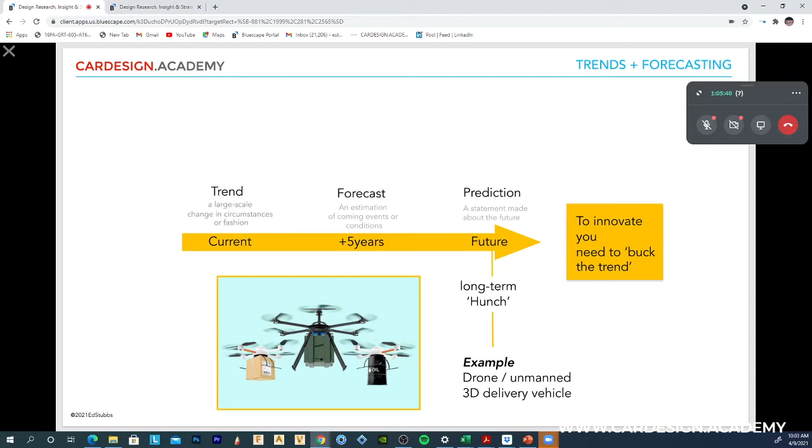So those three elements - trend, forecast, and prediction - are a really helpful framework when you have an idea that you're basing around something that exists now. It's a really helpful model to map out possible scenarios around an initial concept idea. So trend, forecast, prediction, and the time frames can be whatever you want.

For instance, when we're looking at automotive projects, a facelift can take a year or two, a mid-cycle refresh, and so something like a new model can be beyond that forecast period, 5 years plus into the future as well. So that can change according to the industry that you're in. So a couple of other examples just to cement what we're talking about here.

Let's say you embark on some research around social trends that give you some understanding of how people are behaving in certain societal conditions. What we find is that you can pull out from a series of data a clear statement that suggests a lot of people are lonely and have a technological dependency. That's something we have data for now.

So research around data that exists now can feed into a prediction of what might happen in the far-term future. We take that same idea about loneliness and technological dependency and extrapolate it to guide a project. It can be as straightforward as saying a vehicle can become an enabler of social interaction. We know it's beyond A to B, but it can become the hub of community behavior, a place where people gather to eat, or gather to listen to storytelling, or watch films together. You can take that one insight from a current trend, and with that extrapolation, create a strong idea that has a fundamental basis in today's fact.

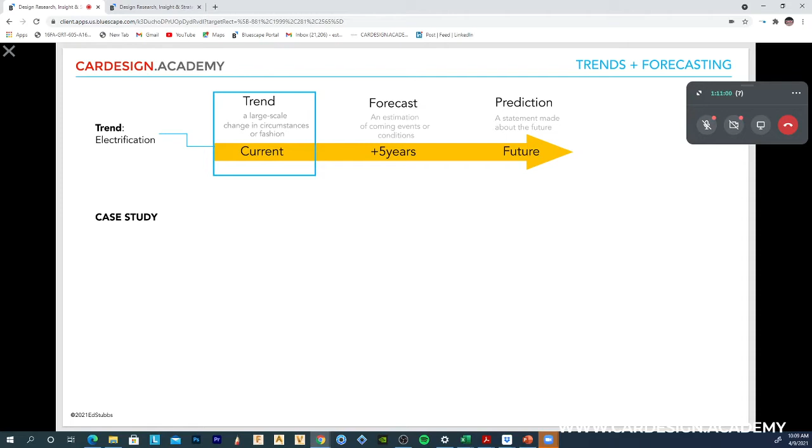What I'm going to do now is go through one other example, a simple one that everyone, I'm pretty sure, is fully up to speed on, as you're all automotive in some way or another. Let's talk briefly about the trend of electrification. It's on the cusp of being a large-scale change in circumstances or fashion, certainly in certain countries where the uptake of EV is huge. Norway springs to mind at the moment. So let's look at that in some detail and understand what we can predict from that current trend.

At the moment, electrification, compared to existing internal combustion engine cars, has huge tangible benefits. There are also some drawbacks, one of which is weight, partly because we're building around generally fairly conventional construction methods, componentry, and assemblies that are previously or very similar to conventional ICE vehicles.

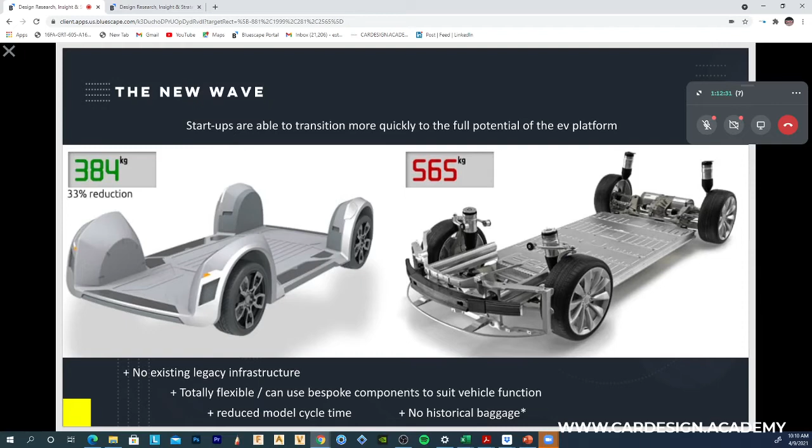However, if we take this idea of electrification and look at what's state of the art, the cutting edge of that technology now, there are plenty of startups out there who, because they're not legacy companies, don't have huge numbers of plant and billions invested in production lines and infrastructure. They're able to make huge transitional shifts towards much lighter, more modular and compact components that can really impact the design of the vehicle. They can be totally flexible, and you can plonk on any body frame, any body shell you like, giving a huge number of different functional vehicles. So we're looking at the agile innovators around that trend of electrification.

Some of the enablers here in terms of innovations, if we go back to that RISE acronym, if we look at Canoo for instance, Canoo are the first company globally, I think, although Infiniti messed about with it, to introduce true steer-by-wire, so no connection between steering column and steering rack. I think there are some legality issues in terms of how that's applied globally, but that's a true enabler to allow huge numbers and true vehicle modularity around this EV platform.

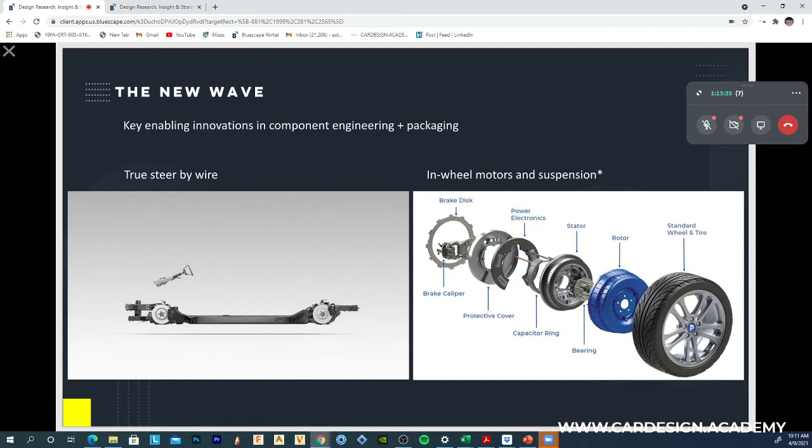Another potential enabler is the in-wheel motor and potentially in-wheel suspension. Again, it's not really viable at the moment because of unsprung mass problems and implications for ride and handling, but it's on the cusp of becoming a thing.

If you look at perhaps the cutting edge of skateboard chassis at the moment, a company called REE, I think an Israeli company, have presented a number of different concepts around this kind of skateboard chassis, with every component shifted as far outboard as possible so it doesn't impact on cabin package space. Everything's modular and swappable, a fully scalable, stackable system. That's current state of the art.

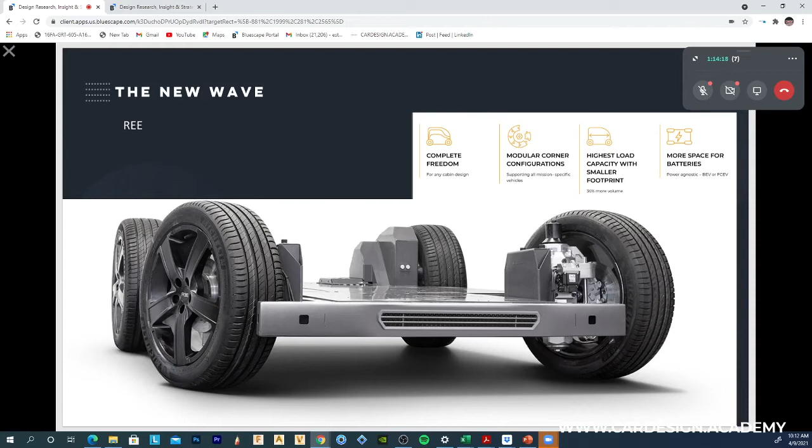If you look at something perhaps a little more understood, which is Canoo, we've got the steer-by-wire I've mentioned. We've been able to see the main components, like the HVAC system, which is huge and in most cars takes up the bottom of the center console, shrunken to an extent but shifted to where the internal combustion engine used to be. So some real package opportunities opened up by this trend of electrification.

Batteries contained within the chassis profile, no great shakes, that's pretty understood at the moment. One thing that's potentially interesting is that this idea of shifting components around has enabled Canoo to use a transverse leaf spring, a carbon or composite leaf spring. Again, not unique, but it brings all those components that intrude into cabin package away and under the vehicle. That's what it's all about, effectively.

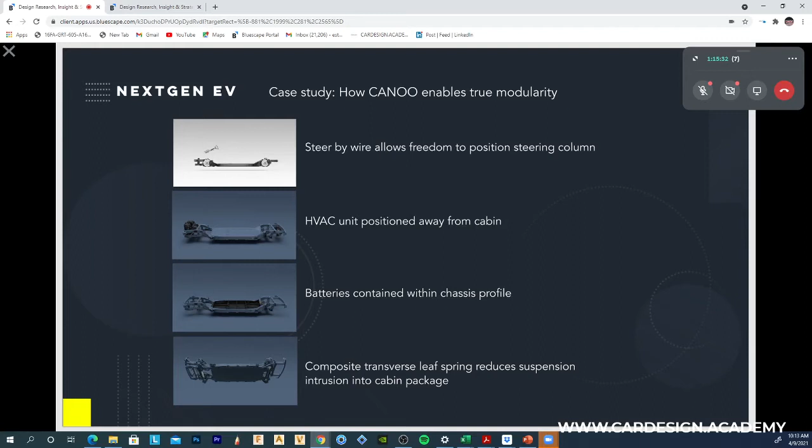And that push and extrapolation of what electrification can offer can be seen here, where we have the modular shared chassis, with a large number of vehicle segments and functions able to operate on that one shared skateboard chassis. I won't play that. And effectively, just to finish up this segment, what that's offering is a full circle back to the good old days of the Model T and body-on-frame.

Which was the whole point about the agility of the production line. We've moved away from that now generally, apart from various trucks, but effectively we've moved to monocoque for cost, rigidity, etc., and various reasons. The current infrastructure is based on monocoque.

This paradigm shift, this hunch, this bucking of the trend that innovators, the agile companies are able to do at the moment, such as Canoo, is really going back and enabling what Ford Model T did all those years ago, which, if you look at the brochures of the time, sorry for the history lesson, but it does have relevance.

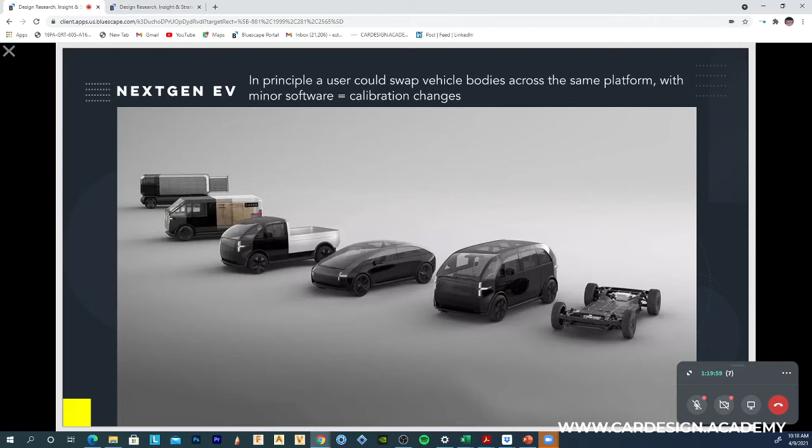You've probably heard of these kinds of concepts where you get a share in the chassis of the skateboard and pay a monthly fee for that. Then you can take it in and get a body style changeover in a matter of hours while you visit the store down the road. So you have a road trip package, a passenger vehicle package, the Canoo off-roader, which they brought out a few weeks back as well. So those elements have a knock-on effect to the user experience, the journey experience, if you like, of using that vehicle as well. All of those elements interlinked.

Okay, let's move forward across here.

This will form the basis of what we're going to be doing over the next few days. I'd like to share two projects in particular that are quite nice exemplars of using trend research and extrapolations of that research to inform a really strong initial design concept or design brief.

The first task is built around looking through the megatrend material provided here on Bluescape, and to pull out 4 to 5 key trends, forecasts, or predictions that you consider form the basis of a strong concept. They might be trends that you extrapolate into a prediction, or actual predictions made within those materials that you can take wholesale, piggybacking on that data to support it as the formation of my concept brief, my concept definition.

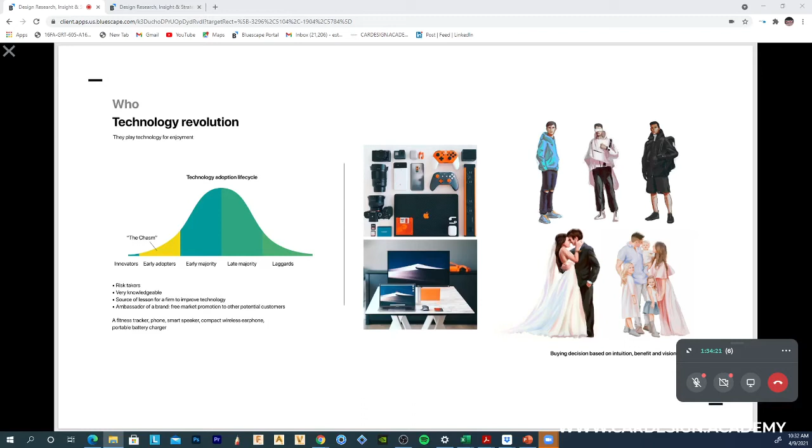So this is a little bit around personas, which we'll look at in more detail next time. But this is generating the story, the narrative that supports and informs the design that comes out of this.

And then we start looking at some scenarios and, if you like, basic storyboards - something we will look at in the next session. But looking at the idea of the vehicle physically connecting to the house.

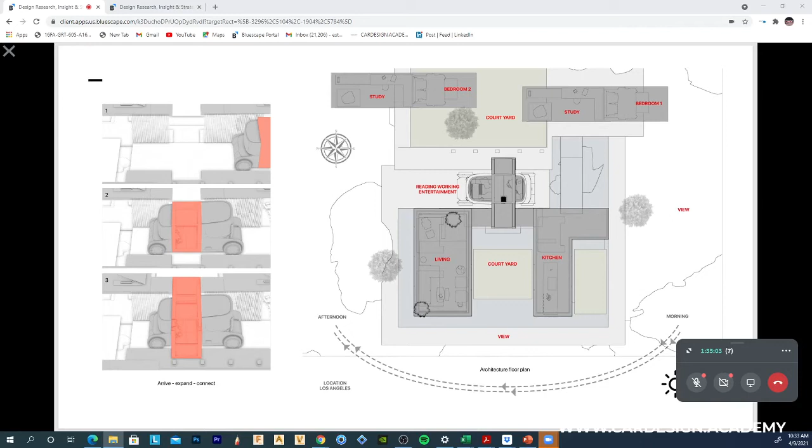Then moving across into the basic layout and how it all integrates together. I'll just show you the rest of this. It's less relevant to the research side, but I would like you to see how it evolves, because we're creative, we're interested in this kind of automotive solution.

Interesting connection with the idea of different phases of where you live - so you get this morning sun in the kitchen.

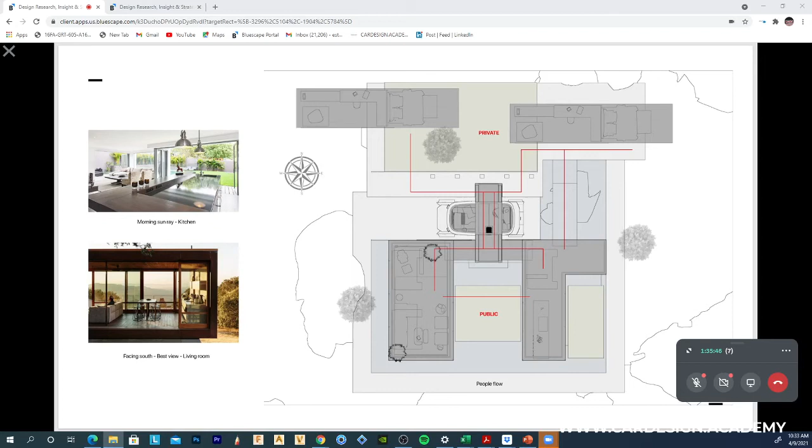And with this kind of proposal, he's suggesting that actually it's very modular and the rooms can be interchangeable as well. So he was designing the living space and the vehicle that integrates into it.

In terms of an experience and using the technology, the cutting edge technology, to heighten those experiences - so we're talking about using projection mapping to create perhaps an experiential space, and interactive lighting technology, so that it becomes an immersive experience in terms of your touch points, your haptic elements within the vehicle, and it brings people together through technology.

That was one of the key themes here. Again, some other examples of that using his particular interest in his painting, etc. But perhaps an opportunity to create an immersive experience and add interactivity.

But also, that's kind of expected on new concepts, new vehicles, new proposals. This idea, though, is strong around bringing people together and to give them something from traditional communities, perhaps, that we feel we've lost.

Most people will say, what with social media and always being connected, I'm always online and talking to people, but my actual face-to-face contact and community sense is not as strong as it was when my parents were the same age.

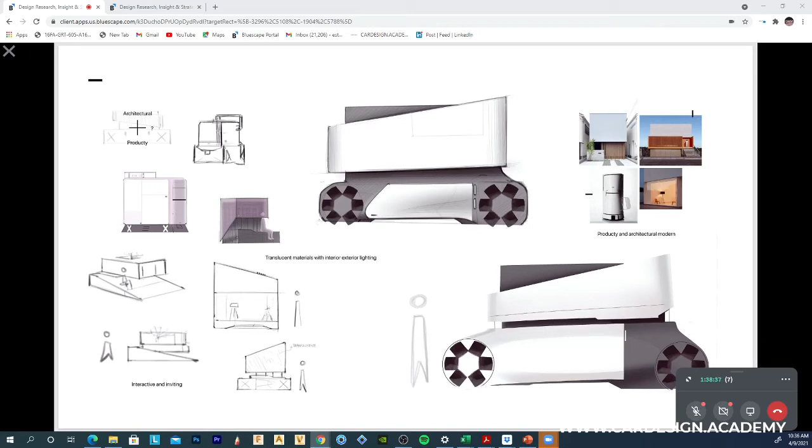Sorry, Ed, how can I see what you're presenting again? My internet went off and I had to reconnect. Is there anything I can click on? Let me try this again. Oh, hold on a minute, that's screen sharing. Oh, there you go, is that working? Super, perfect. Thanks, Ed. I don't know where that broke off, but I'll just carry on from here.

So this is moving into the creative stages of the project, which this part of the course isn't really focused on, but it's useful to see that extrapolation of an idea and how this person has developed it, because those ideas stayed central to the concept all the way through.

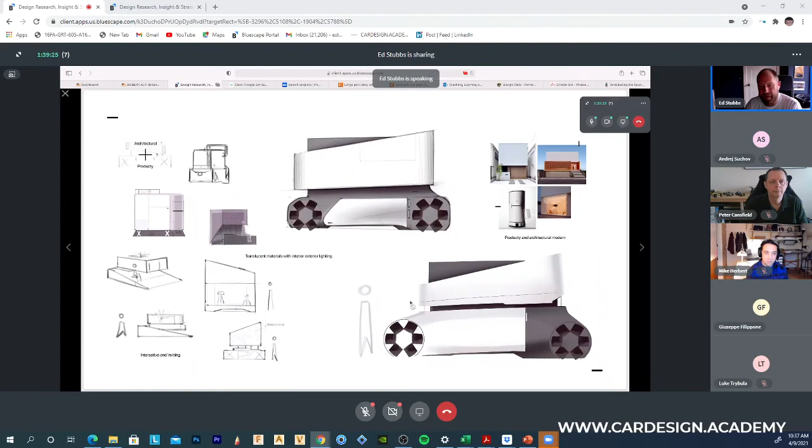So these are the initial ideation sketches, using very clear product inspiration, but also architecture, because that's one of its main functions, exploring different forms with some perhaps Japanese references to inform these square and modular elements of architecture.

And then starting to explore how it could blend and link to a dwelling or a residence, and how you could connect people through the vehicle.

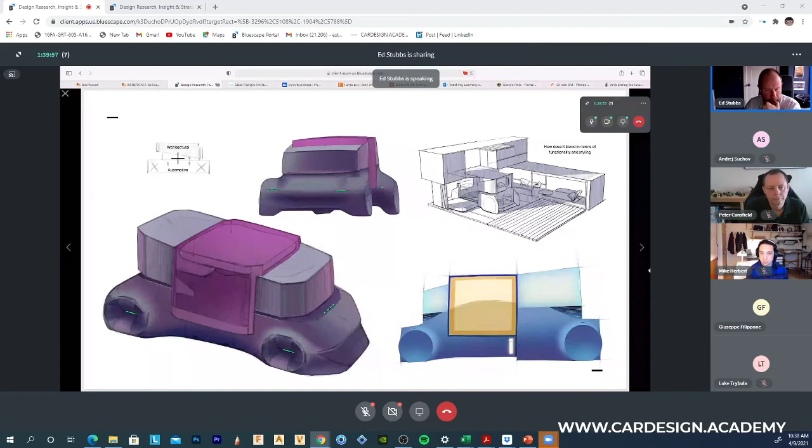And these are really nice sketches that show the different ways, different levels as well, of how people could connect. So not only with a story floor here, two stories, two floors, but also within the vehicle. It doesn't all have to be linear.

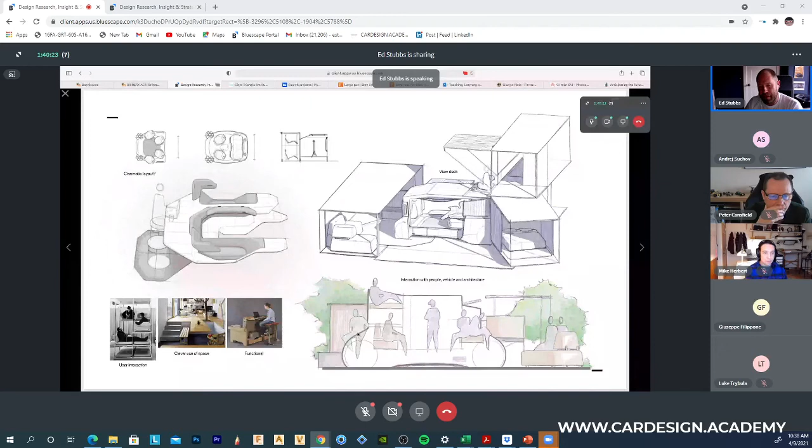If you're trying to create a living and interesting experience in a vehicle, it can actually be on the roof of the vehicle, and that removes you and takes you to a new experience of how you view things. These kind of images are quite powerful to link the outcome here.

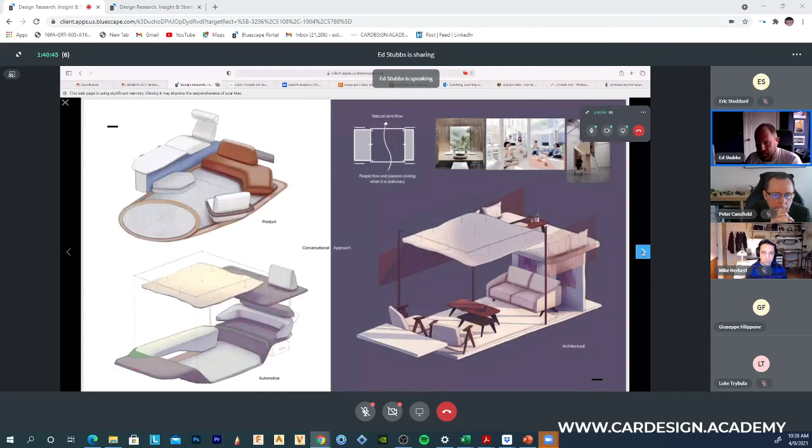And then more depth into the interior componentry and the layout and the function of the interior, etc. So I just thought I'd share this project, and you can look through this in your own time.

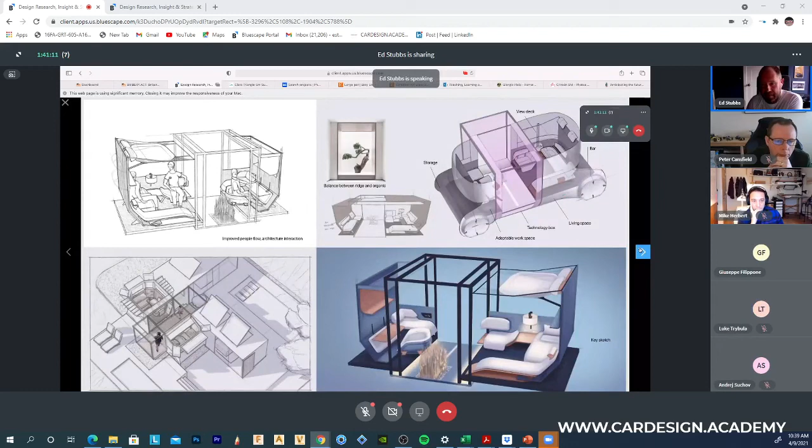It's a particularly strong one, I think, and really creates something that's really fresh, a very good example of something bucking the trend, perhaps, rather than just something that is an expectation of what we might imagine today.

So I'll leave that one with you to look through, and I'm just going to quickly go through this for 5 minutes before maybe we can have a discussion or comment. So this is the same kind of level of work, really, but hopefully you can see that.

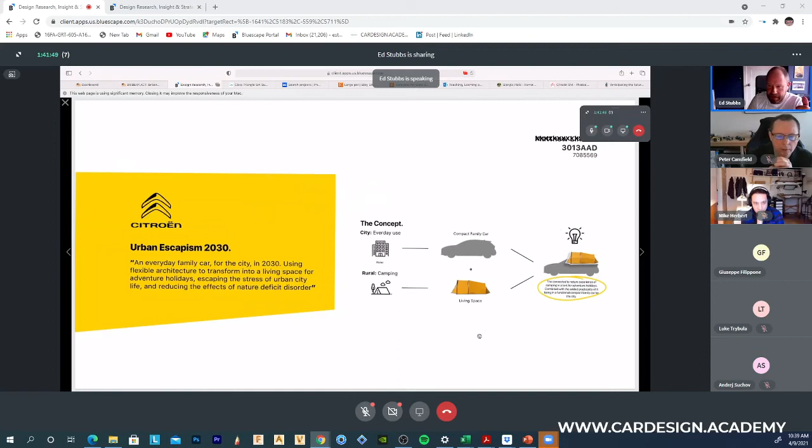Yeah, okay, urban escapism. So this, again, focused very heavily on the initial stages of the project, and they were particularly strong for this. So research informed this definition of the project, which was this huge increase in megacity population.

And also a societal bit of research, which was interesting, or cultural, that looked at nature deficit disorder, which I didn't know anything about, didn't even know that it exists. But that's something that children suffer from by dint of being in front of a tablet or a laptop or a screen the whole time. It's actually a disorder that means they suffer developmentally, and they have connection and communication issues with people as a result.

So you put that element with the idea that more people are living in urban populations, although COVID is adjusting that now, along with this idea that people are interested in an elegant and luxurious camping experience, and you come up with effectively the concept definition that is this.

So let me just move across here. And again, these elements that I'm showing at this point are things that we're going to be working on in the next session, really. We're asking you to do that real upfront piece of personal research so you can bring some ideas that we can then build upon in the next phase.

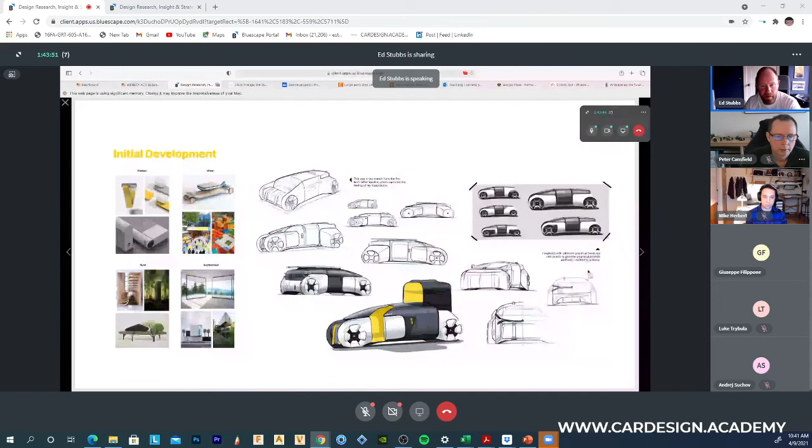So that initial research, though, brought about this concept of creating a vehicle that you can camp in that becomes a real experience. It's not a sort of harsh camping vehicle, and it has interesting elements to the interior experience as well. So I'll just whiz through this so you can see it.

You might have seen this on various forums, etc. It won the Magna design competition last year.

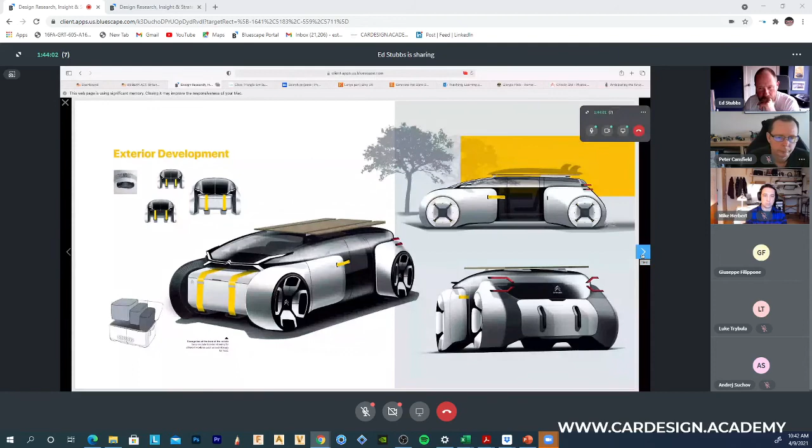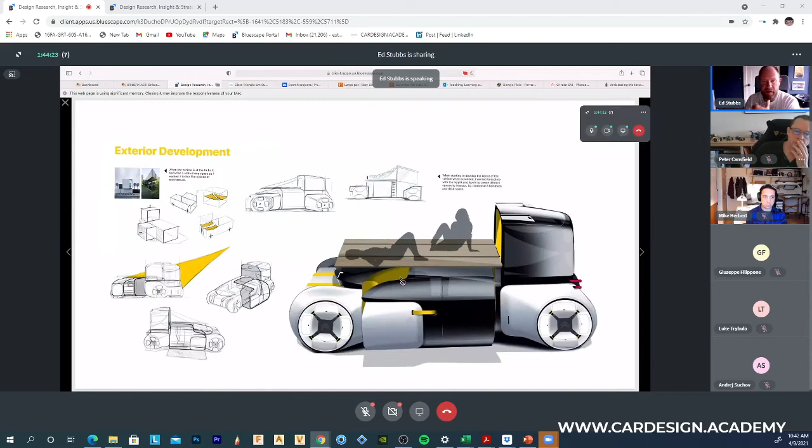And again, this very strong idea, similar to the other one, of moving people around a vehicle. It's not all about being within a vehicle, within a space. It's about how people can interact with it, around it, outside it, on top of it, and use it as a hub for other activities. So that's the connection between those two projects.

Again, you pull an element off this vehicle and it becomes a social space, a seat, inspired by the original 2CV. That's a really nice interpretation of using things around the vehicle. Then on to the final design with its elements that pop out and create new spaces, new experiences for the occupants.

Okay, and then the rest of that is the in-depth look at design. But all of these can link back to certain elements of the trend research that we looked at, essentially getting a family out, having a new experience in a vehicle.

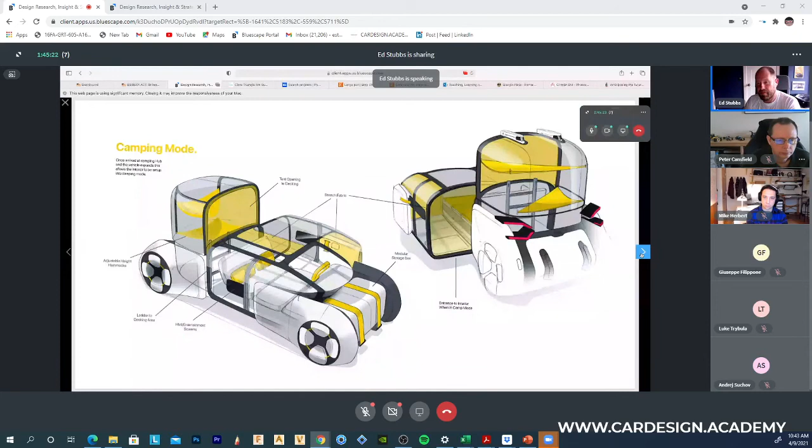Okay. So I hope with that kind of introduction to the initial part of this through trends and forecasts, there's some food for thought.

In terms of how we can roadmap this initial part of the research journey. I would say that some people in design kind of find this side of the project a little bit dull and just want to get on and sketch, etc.

But in my own experience, talking to studios and OEMs, we have a lot of collaborative links with them in Coventry. The narrative of the design and the experience that you generate is becoming more and more important, particularly with things like autonomy around the corner. Brands really need to differentiate themselves in different ways than traditionally. So this focus on the experience, the innovative experience, is really important to future employers.

So it's not as exciting as sketching in some respects, but it really underpins a really strong concept, and hence the focus today. So I've probably rattled on a long time there. I'm sorry for that. Hopefully it was interesting in some respects.

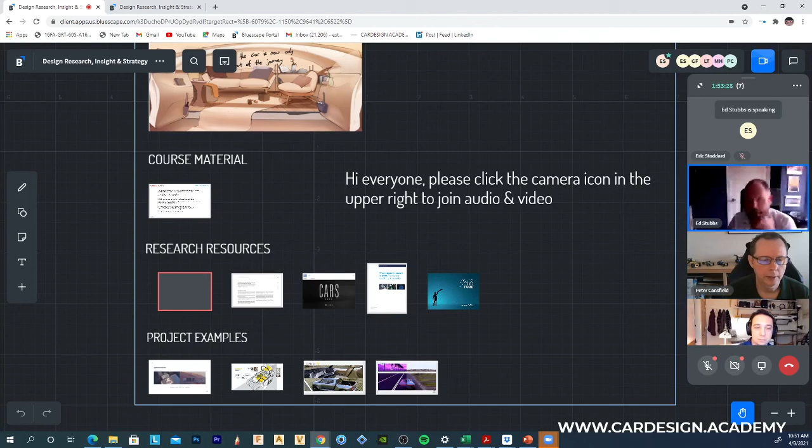There we go. Alright. Are you seeing it on yours or mine? Yeah, I can't... we are. Okay, alright. So the first box is just... what's in that first box there? Right, that first box is the Ford presentation with an X in it. For some reason that's not working - that's messed up, so I've just replaced it.

Because I saw that wasn't working, there's another trend report that I've uploaded here. This is significant - it's many pages, but it's a study around autonomy and our attitudes towards autonomy, people's fears particularly and concerns, and what design opportunities there are to address those. So that's quite a useful psychological approach.

Okay, I'll just ditch this one. So sorry, one question - that Ford stuff, is that a series of presentations you can just download from the internet on various subjects? Yeah, I've done that historically, they've done this for years. It's a PDF document typically that you can download. So I'm just wondering if you can actually open it directly through here.